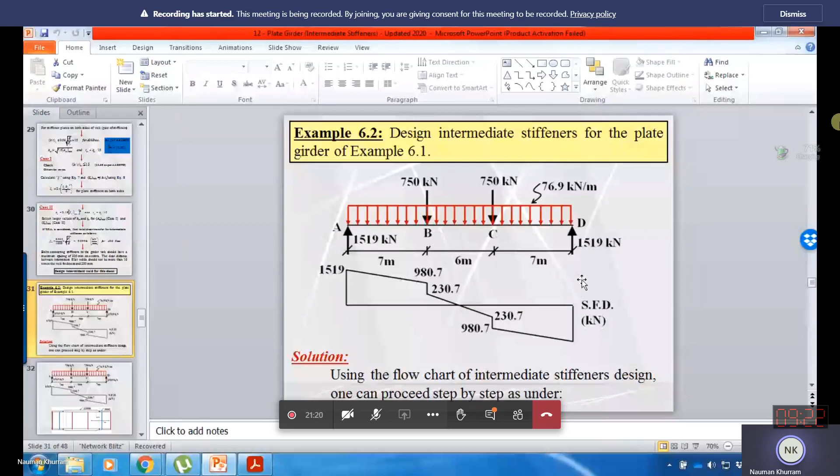But now in this second example, we will check the shear capacity of the web because we know the web size, which was 2300 millimeter in depth and 10 millimeter thick. Obviously the web will buckle, because the thickness is very small as compared to the depth.

So if the shear capacity is less than the applied shear, and we get the applied shear from the shear force diagram, then in that case we need to stabilize the web or increase the shear strength of the web by providing an intermediate stiffener.

By using an intermediate stiffener, we intend to divide the web into different sub-panels. By providing the stiffener, we can also achieve tension field action, and due to tension field action, the strength is further improved after buckling.

So how do we start? We are using the same example 6.1, where we have already given the beam length and the loading, and we have already sketched the shear force diagram, shown here. It is subjected to a maximum shear of 1519, and then shear force decreases within the center span depending upon the applied load.

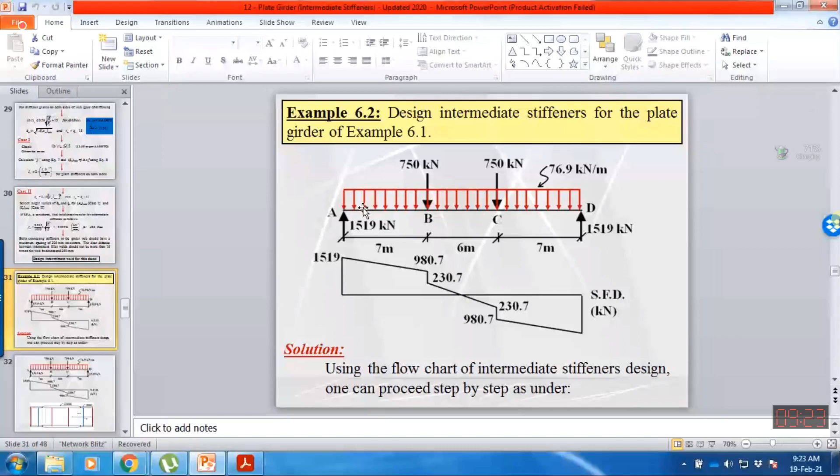When we are given the loading, we already know the location of the bearing stiffener. So we are going to design two types of stiffener: number one is the bearing stiffener, and number two is the intermediate stiffener.

Design of bearing stiffener we will learn in our topic, but for intermediate stiffener we have to carry out the design in this particular example. We already know the location of the bearing stiffener, because what is its function? They actually resist the concentrated force by providing column action.

So bearing stiffeners are provided where we have a concentrated applied force or force reaction, also termed as external forces or concentrated forces. They are provided above the force reaction and underneath the concentrated applied force, to prevent web crushing or web crippling and to safely transfer this concentrated force to the web.

So the location of the bearing stiffener is already known: two are acting at the ends above the force reaction, and two exactly underneath the applied force. One thing more, bearing stiffeners serve both as resistance to the concentrated applied force and also as intermediate stiffeners, so they also fulfill the requirement of intermediate stiffener.

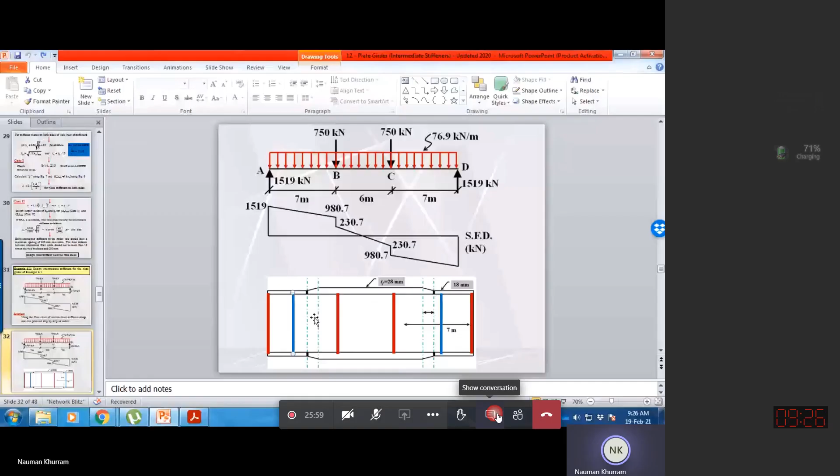In most cases we provide all intermediate stiffeners at equal or uniform spacing. But both AASHTO and AISC suggest that the first stiffener should be provided closer to the bearing stiffener, because the ends are subjected to larger shear force. You can see the shear force is maximum at the end and decreases as we proceed toward the center.

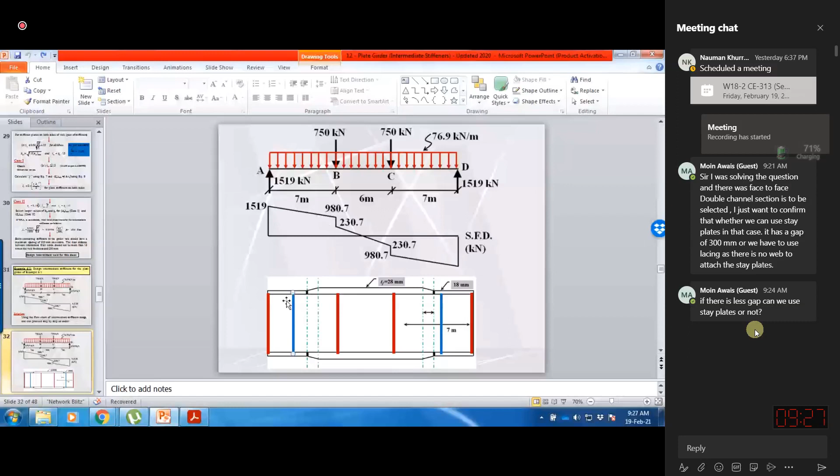So AISC says we should always provide the first stiffener closer to the bearing stiffener, at less spacing, and then the rest of the stiffeners provided in the central span should be at maximum and uniform spacing.

AISC says that because shear force is maximum at the end, we are not supposed to consider tension field action for the first panel. Even though tension field action will be available, we want to ignore it to enhance the shear capacity, or to use a larger factor of safety.

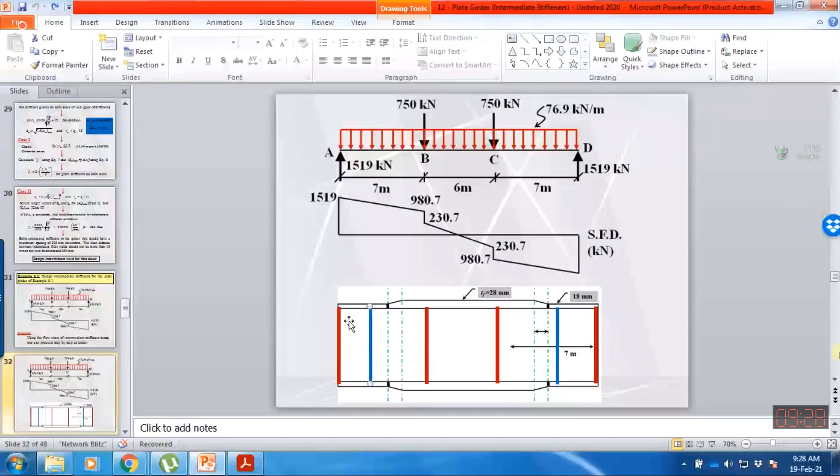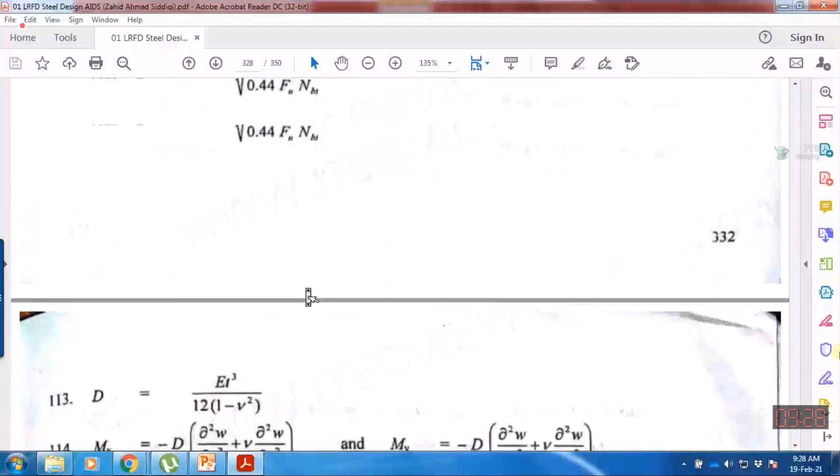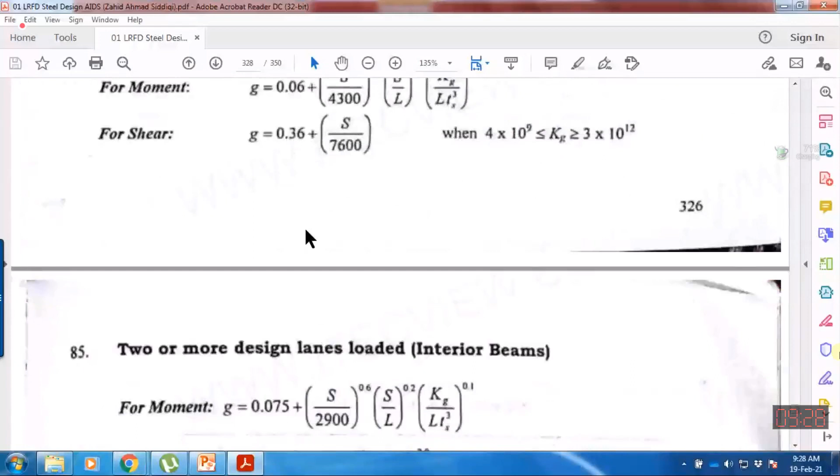So how can we do this? Actually, you don't need to memorize the procedure because the complete design procedure is provided in the LRFD design aid, on page number 324, I guess. So the design flow is also provided there.

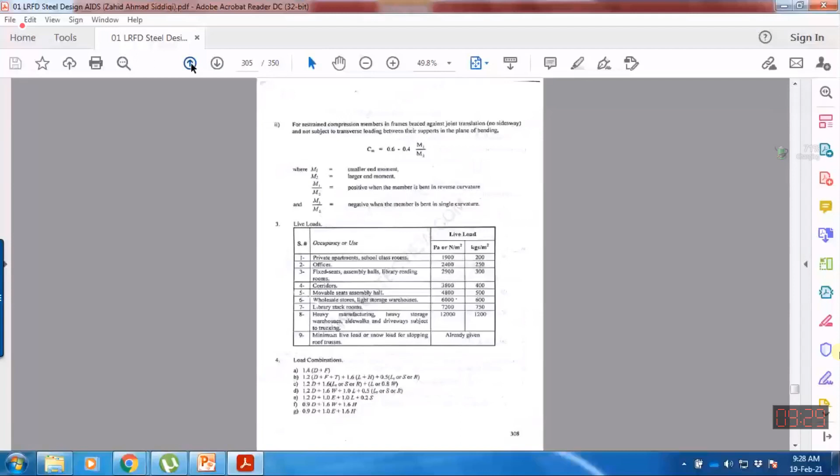Yes, from page number 293 in the LRFD design aid, you have the design flow chart. You can consider this design flow during the examination also, so you have to follow it. I will explain why it's considered this way. As I explain this example, I suggest you open the LRFD design aid and compare the equations, because you're supposed to consult this design flow during the examination.

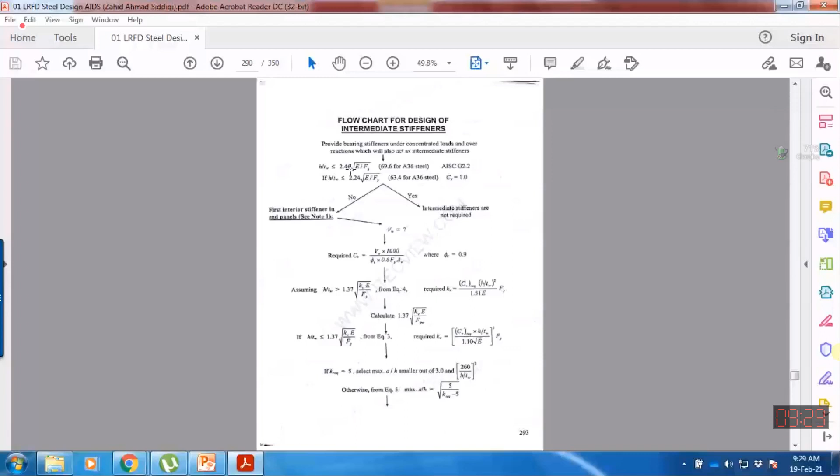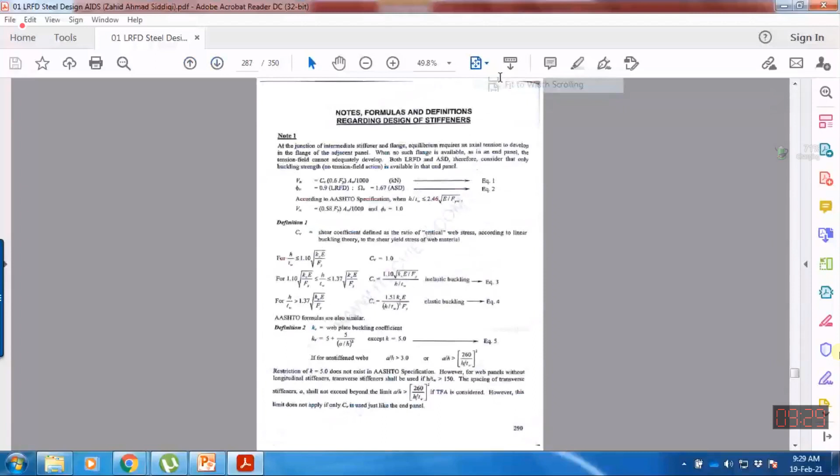Okay, I will explain my design. You are quite familiar with this equation.

In this design equation, the shear capacity should be more than the applied shear. What does it mean? If I want to decide the location of the first intermediate stiffener in this panel, it will be somewhere here, and I want to know the spacing, so I should know the shear capacity of this web panel. This shear capacity will be compared with the maximum shear force subjected in this panel, which is the shear force at any point within this panel.

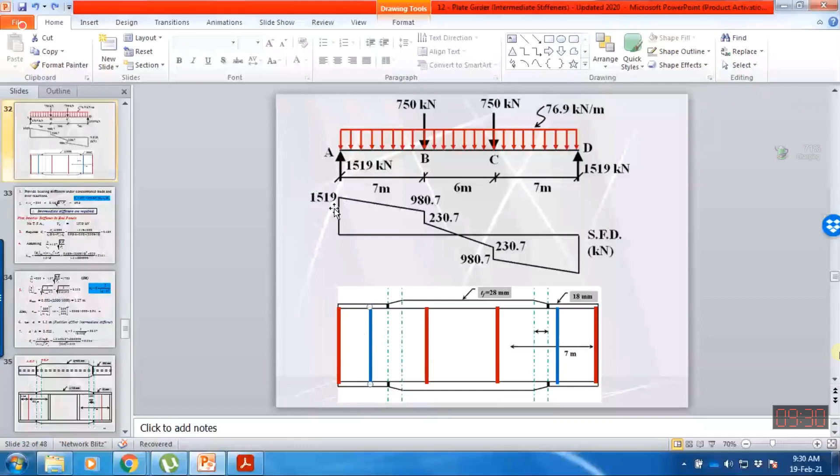So this panel is subjected to a shear force of 1519. So applied shear VU is 1519, and we are going to compare it with the web capacity.

Shear capacity is equal to 0.6 Fy, which is tau y, the yielding capacity of the web, times the height of the web, times the thickness of the web, and into CV. We are ignoring CV prime because we do not want to consider tension field action for the first intermediate stiffener. So the first step is we need to check this case.

Height of the web over thickness of the web ratio, it should be less than this parameter 2.24 under root E over Fy. You've been using this equation in hot rolled design, because if height over thickness of the web is less than this parameter, the web will never buckle - it will always fail due to shear yielding.

So in that case, CV value is equal to 1. But if this value is more than this factor, the web will always be under buckling and CV value will be less than 1, because CV converts the shear yielding strength into the buckling strength, or critical shear stress at which the web will buckle.

Okay, for the first intermediate stiffener, we do not want to use tension field action. So VU will be 1519. Actually, we want to determine how much CV value is required to have shear capacity equal to VU. Because we know 0.6 Fy, we know the height of the web, and we know the thickness of the web. So we want to determine the minimum CV value required such that shear capacity should be more than VU, and from this CV we want to determine the spacing of the first intermediate stiffener.

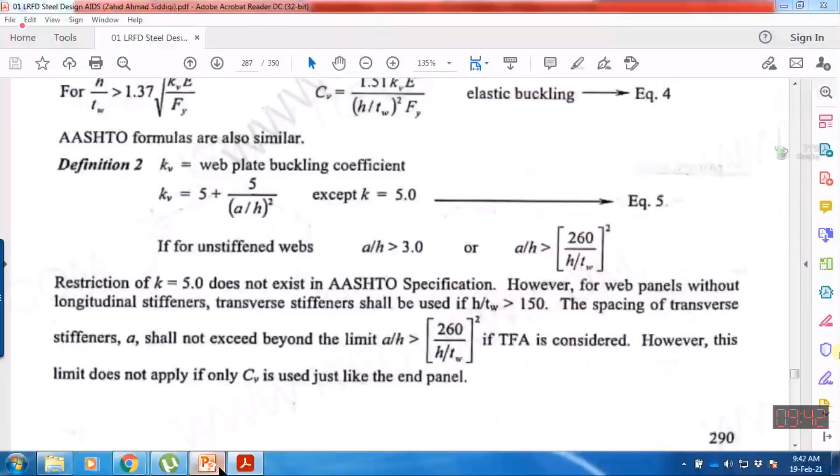So A required is 1.27 and A maximum by AISC, substituting the values, 260 divided by 230. We have divided the whole parameter by 1000 to convert the A maximum into meters.

If this value comes out to be more than A maximum, then we will provide the stiffener at maximum spacing. So A required is, whichever is lesser out of these two, that is the A required. So first stiffener should be provided at a maximum spacing of 1.27. So spacing of first stiffener should not be more than 1.27.

But we will provide at a spacing less than this value, maybe to bring it to a safe limit. So here we have selected the A value 1.2, a little bit lesser than this value. You may select 1.25 also, that will be perfectly fine. If in examination somebody has taken this value 1.25 or somebody has taken 1.2, both are perfectly okay.

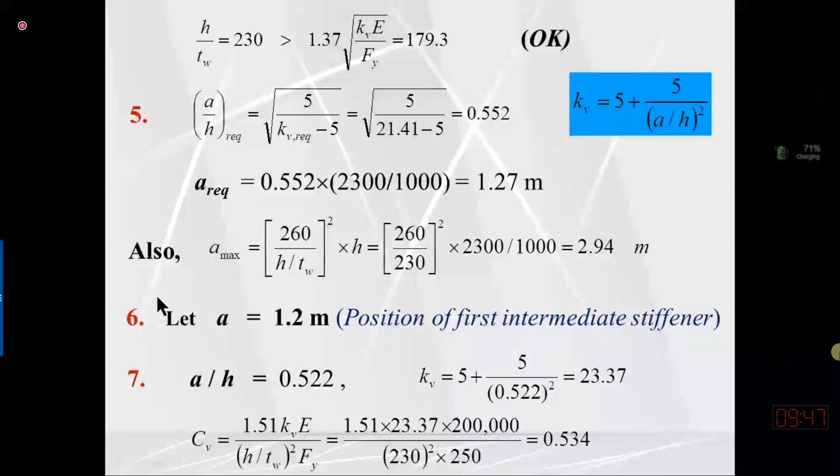Okay, next we are having this panel now. In this panel, we need to check whether we require the stiffener or not, because first stiffener we have provided at 1.2, just like here. So now for this panel, maybe we do not require a stiffener. First, we need to check the capacity of the web without any stiffener.

So what is the applied shear for this panel? We need to check what is the maximum shear force within this panel. So the maximum shear force will be at this edge, at this point, which is at a distance of 1.2 meters from this end. So we can determine from the shear force diagram: 1519 minus 1.2 times 76.9.

If there is any student who just logged in, Naveer Abbas, if you have just logged in, please feel free to talk.

So we need to check what is the shear force for this second panel, or for the other intermediate stiffener. VU will be equal to maximum shear force at this edge, which is 1519 minus 1.2 of 76.9. Maybe we do not require a stiffener here, maybe the shear capacity of the zone is more than this applied shear. So we need to check this.

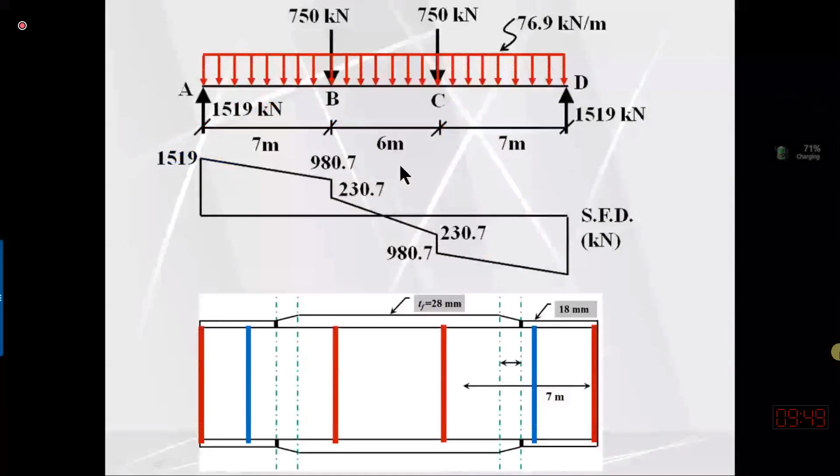For the second intermediate stiffener, what is the VU? VU at a distance 1.2 is 1519 minus omega into x, where x is 1.2, and omega UDL load is 76.9. So VU, applied shear for the next panel, will be 1426.7. Maybe we do not require this stiffener for the next panel.

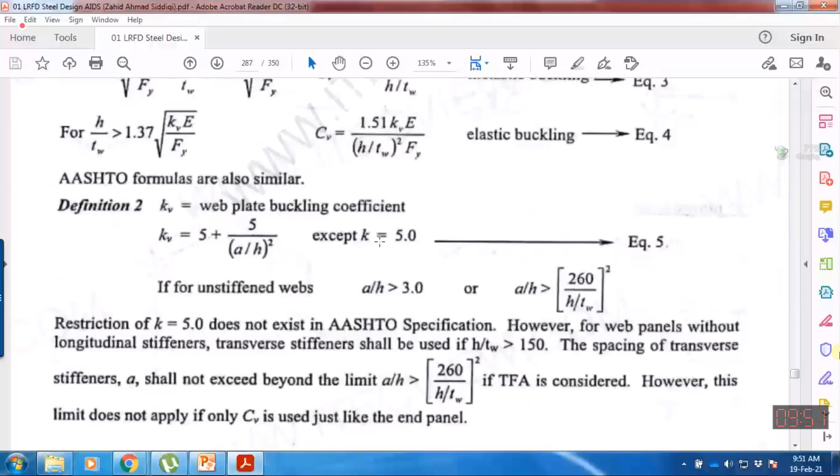So what we will do is determine web capacity without an intermediate stiffener. In LRFD design aid, if we are not providing an intermediate stiffener, then KV value will be equal to 5. This KV value of 5 doesn't exist in the specification, but we have said that if we are not providing an intermediate stiffener, or providing it at more spacing, KV value will be equal to 5. Using this KV value of 5 gives the CV value for the shear capacity of the web alone, so these parameters can be simplified for KV value equal to 5.

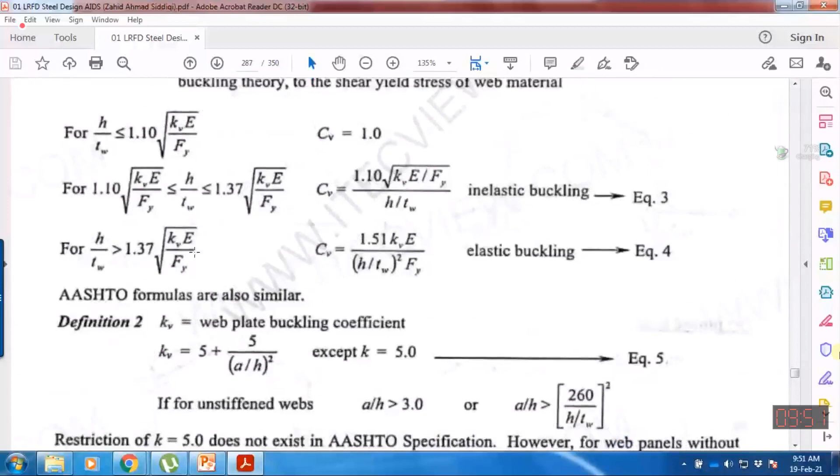In this equation, KV value equal to 5, and E value is 200,000. This 5 times E gives 1,000,000. So if you take the square root of 1,000,000, that gives 1,000, and 1,000 multiplied with 1.37 gives the answer 1370. So you can convert this parameter for KV equal to 5, and this parameter will become like this.

For KV value equal to 5, this parameter, which is 1.37 under root of KV into E over Fy, if you substitute KV value 5 and E value 200,000, this parameter becomes 1370 over under root of Fy.

Just check the height of the web over thickness of the web ratio. It is more than this parameter, and this parameter is the same as that parameter. So in that case, you need to use this equation to determine the CV value.

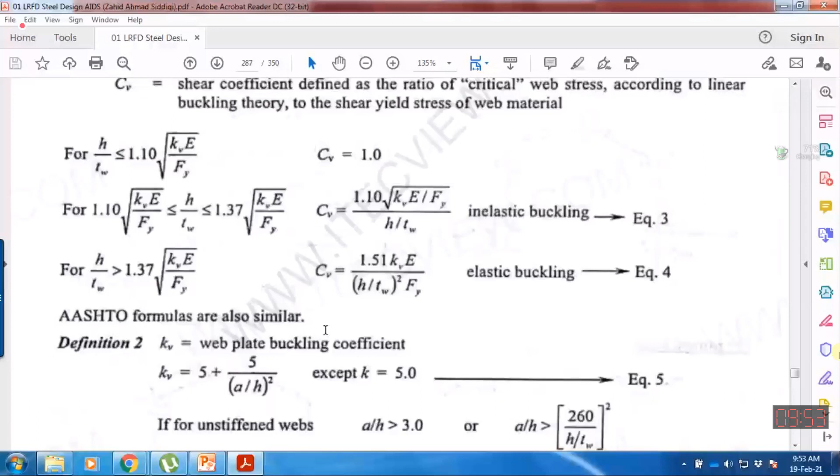After substituting all the values of height over thickness of the web and Fy, the CV value comes out as 0.114. What does this mean? It means the web is buckling at a stress value equal to 11.4% of the shear yield value, or the buckling strength of the web is equal to 0.114 times the shear yielding value. So almost 89% of strength we are losing, or not able to achieve, because the web is too slender or too thin.

But anyhow, we are using this CV value to determine the shear capacity of the web panel. So phi V is 0.9, 0.6 Fy. We substitute the value, area of the web 23000, and the CV value we have placed. So this gives the capacity, 350 kilonewton. This is the capacity of web alone if we are not providing any stiffener.

So web capacity is 354. The web will buckle at an applied load of 350, but the applied shear is 1426, which is more. So it means that the intermediate stiffener, for height of the web over thickness of the web, the second condition is satisfied, which is less than 260.

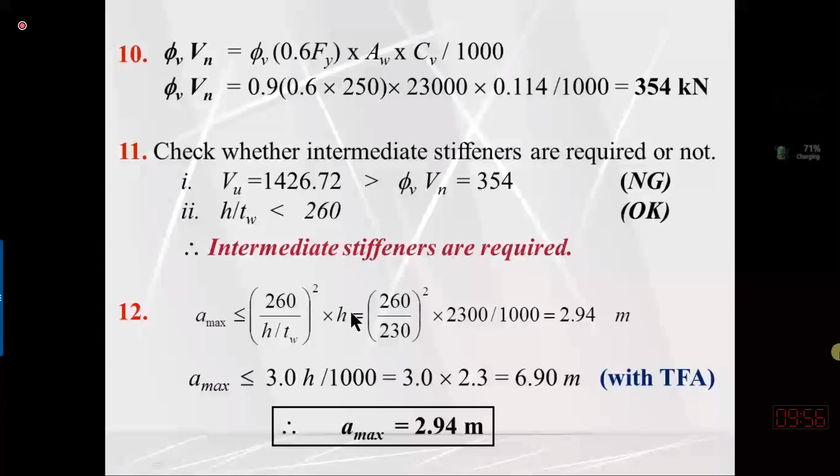So both tension field action formulas, CV prime and CV, are functions of spacing of stiffener value. So first we want to provide the stiffener at maximum spacing. We have two formulas for maximum spacing, as we have also seen in the LRFD design aid. One is A over H ratio equal to 3, and the other is by equating A over H ratio equal to 260 divided by lambda W value whole square.

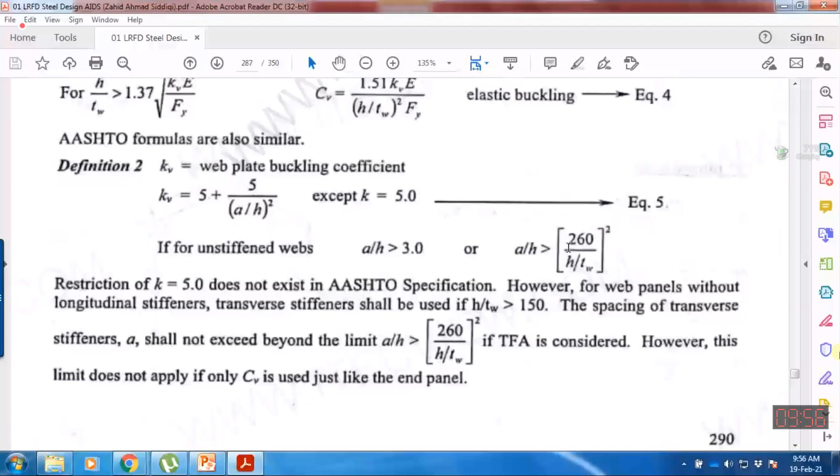So if spacing is more than these values, we will consider that even though the stiffeners are provided, they are not contributing to the shear strength. So A maximum is obtained from these two equations, and the lesser value out of the two will be our A maximum that we can provide.

So these are the same equations, but H is moved to the other side. First, A maximum is determined as 260 divided by height of the web over thickness of the web, multiplied by H, which gives 2.94. The second equation gives A maximum equal to 3H. The lesser answer out of these two is 2.94, meaning the second stiffener may be provided at a maximum distance of 2.94.

So first we take this 2.94, and we need to provide at this spacing. We need to decide the stiffener location in this panel, so how many stiffeners are required? We can easily determine this. For example, what is the distance from this intermediate stiffener to this end stiffener?

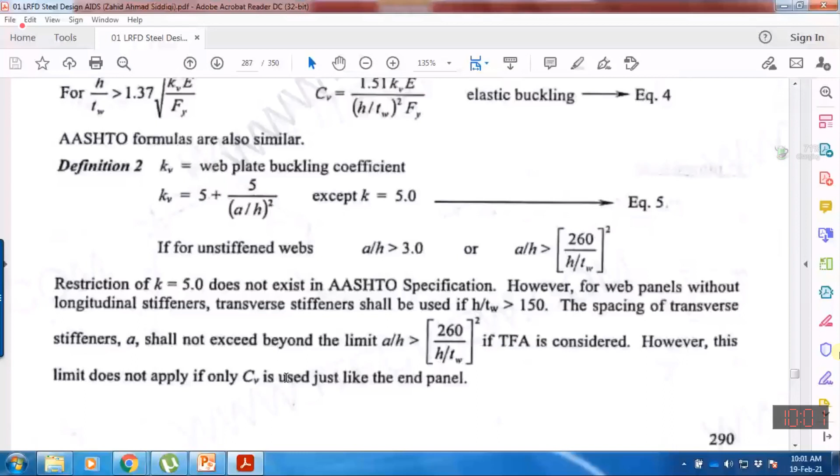You can compute this parameter, 1.37 under root KV into E over Fy, and this parameter is 116, which is less than 230 of the height of the web over thickness of the web ratio. So this condition is satisfying, because this parameter is less than the height of web over thickness of web ratio, so we need to use equation number 4 to determine CV value. So equation number 4 is used: 1.51 into KV into E value divided by height of web over thickness of web ratio into Fy. So CV value comes out to be 0.186.

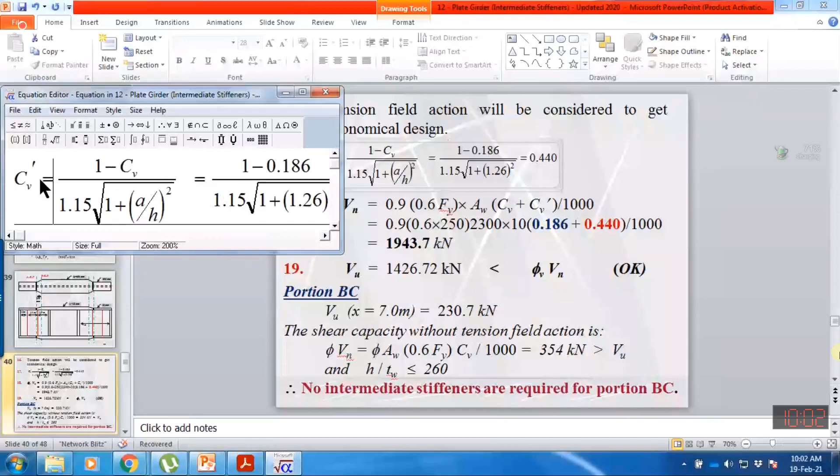And further, we want to achieve tension field action for the second panel, so tension field action will be considered. CV prime value is computed by this equation. Let me correct it — there should be an equal sign. This equation is also given in the LRFD flow chart.

When we determine this CV prime value by substituting all the values, the answer is 0.44. Now we will determine the shear capacity using this formula: V equal to 0.6 Fy, area of the web, CV plus CV prime, because now we want to use the tension field action also.

Phi V is 0.9, 0.6 Fy, web 2300 into thickness of the web. CV value is 0.186 and CV prime is 0.44.

Please understand one thing. Earlier I have explained that field action improves the strength almost 2 to 3 times more than critical buckling strength, or post buckling strength provided is almost 2 to 3 times more than the web buckling strength. So CV prime is the fraction or factor which is letting us know the post buckling strength in terms of yield strength.

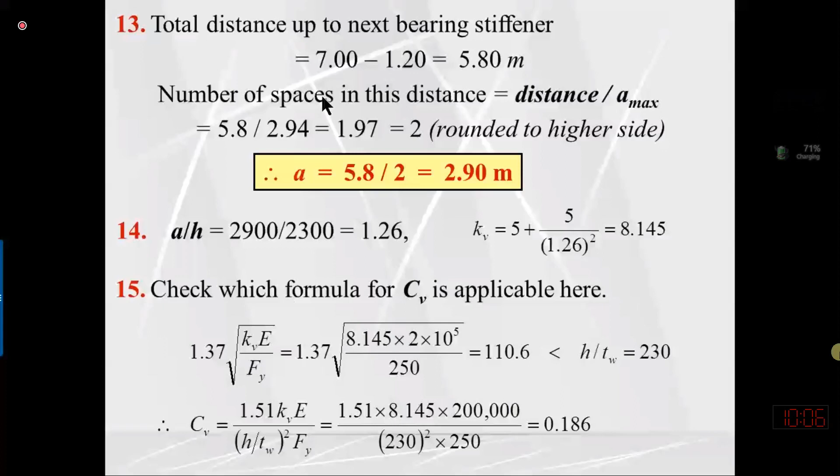You can again determine A over H value and CV value and CV prime, and then you can again recheck the capacity. So if the capacity is more than VU, then it is okay. If the capacity is still less, you keep reducing the A value, and by hit and trial you want to determine the maximum A value for which the capacity is just equal to or more than applied shear. Okay, next is

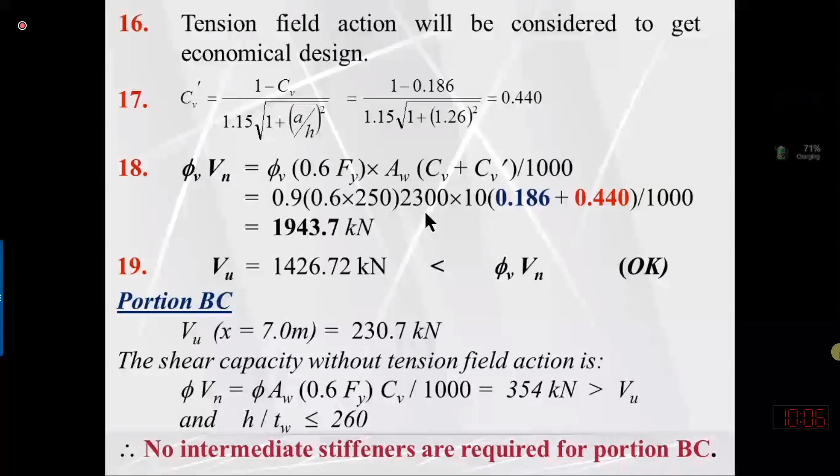Now we have decided the spacing of the stiffener. So we are having one bearing stiffener here, which is also serving as an intermediate stiffener. Now we need to check whether we require any stiffener here or not in this second panel.

In this second panel, or sorry, in the middle portion, first of all, we need to see what is the applied shear for this central portion. So in this central portion, the maximum shear is at this edge, which is 230.7. So applied shear is 230.7, so central span is having the applied shear 230.7.

But what is the capacity of the web alone? We have just determined. So capacity of the web alone without stiffener is 354, which is more than applied shear. This means that we do not require any stiffener in this central portion.

So VU value at a distance 7 meter is 230.7. That we have already seen from our shear force diagram, 230.7. So applied shear is this one.

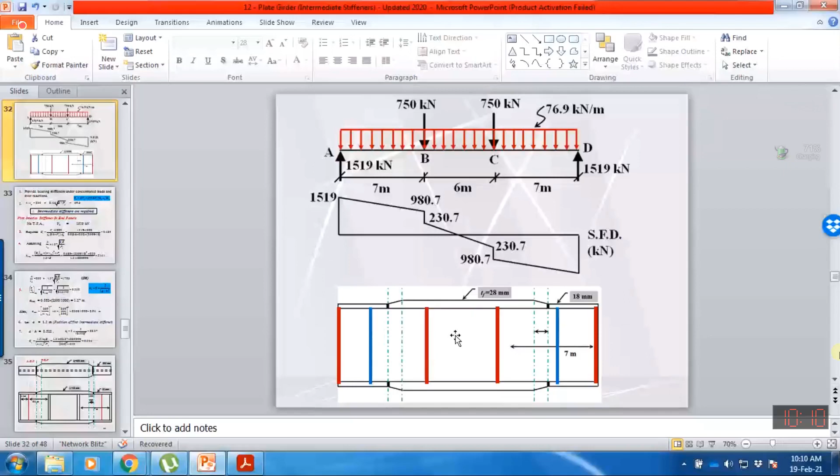So in the first phase, we have computed the size of the spacing of the stiffener. I will not take a break because the next phase is maybe just a small portion. We just need to select the size of the intermediate stiffener. So I will continue because I will try to finish up the lecture earlier.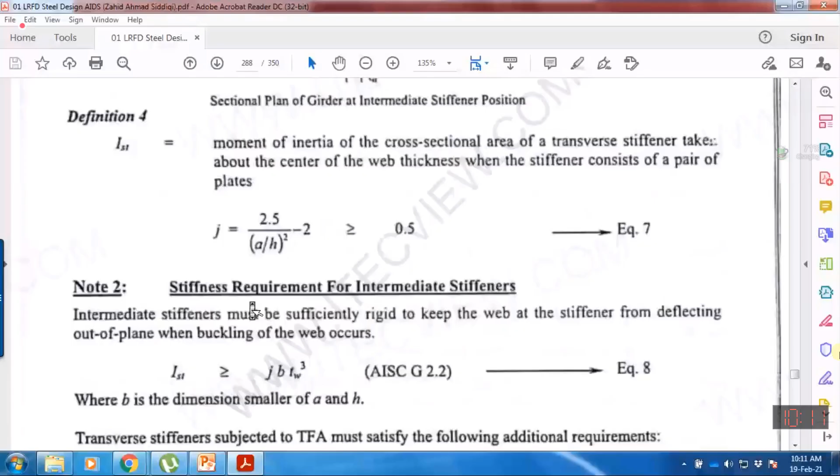So now in the second phase, we need to decide the size of the intermediate stiffener. So the size of the intermediate stiffener is fixed by this AST minimum. Now I will keep on showing you this because I'm following this design flow. I have already completed that. Now I'm carrying out this size of the intermediate stiffener.

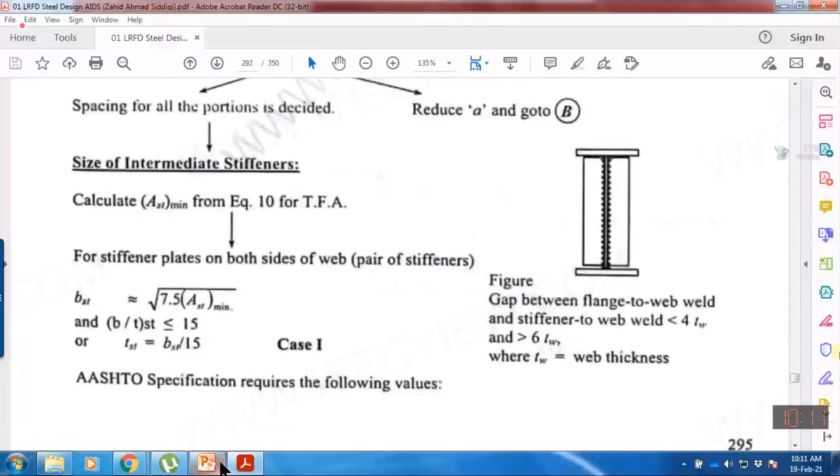So we need to compute the AST minimum, or minimum area required for the stiffener, from this expression. This equation will give the maximum answer if CV value is lesser, and lesser CV value is for the interior segment. So it means that we need to determine the AST minimum for the first stiffener and for other intermediate stiffener, whichever is giving the larger value, that is our AST minimum.

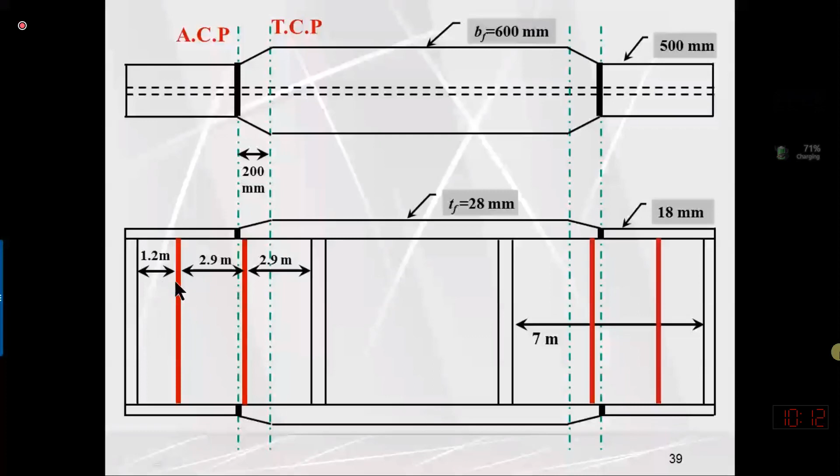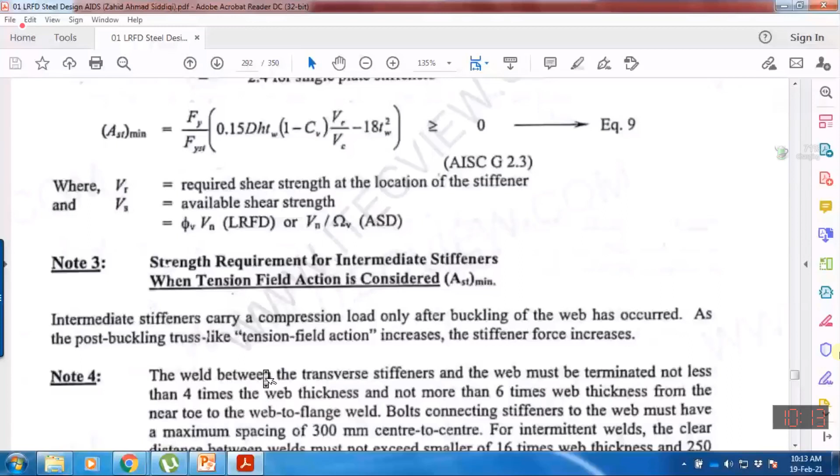ds is the distribution parameter. If you want to provide intermediate stiffener in pair on both sides, then ds value will be equal to 1. Otherwise, this value will be equal to 1.5, maybe 1.8 that we have already discussed, in our specification or design aid. This might be mentioned, yes. If you want to use single plate for stiffener only on one side, then this value is 2.4, but we want to provide this stiffener in pairs, so this value will be equal to 1.

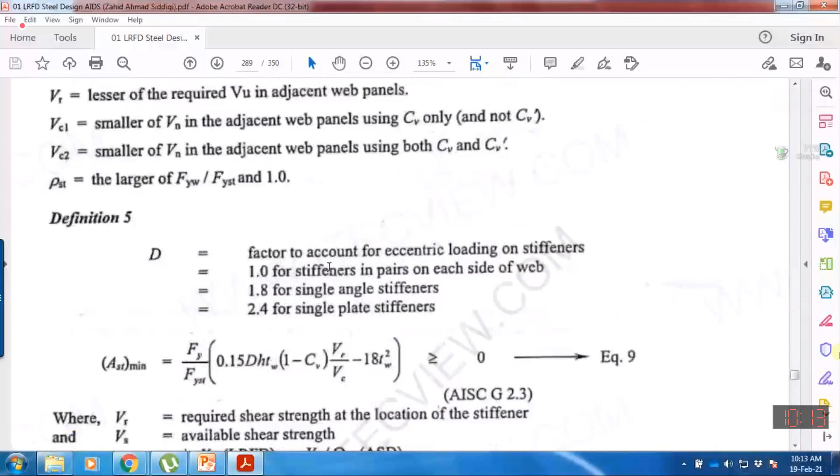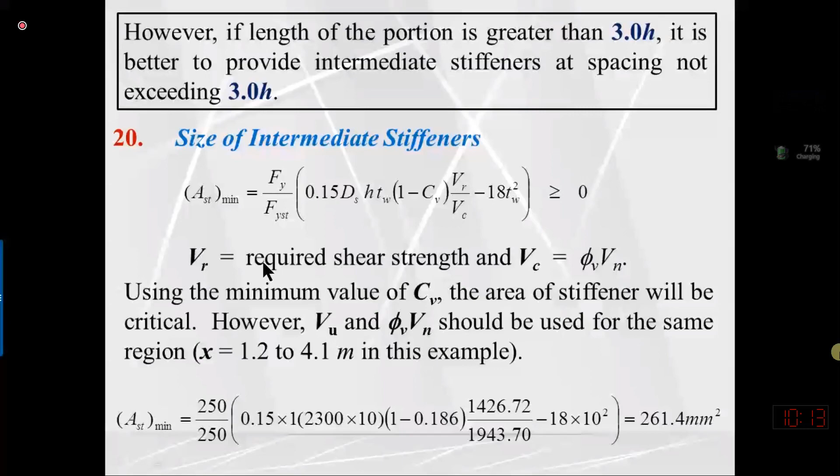And what is the VR value? VR is applied shear or required shear strength, or VC is the capacity of the panel with stiffener. So VR is the required shear, which is equal to VU, the applied shear force that we have already considered in design. And VC is the capacity. However, VU and phi VN should be used for the same.

So we need to compute two AST minimum, for the first stiffener and for the second stiffener. So for the second stiffener, VR is the applied shear, which is 1426 for the second stiffener. 1426 is the applied shear, which is equal to VR.

And what was CV value for the second stiffener? 0.186, and when we determine the capacity, it was 1943.7. So for the second stiffener, VU applied here is 1426, capacity is 1943, and CV value is 0.186.

So AST minimum for the second stiffener is, by substituting the value in this equation, ds value 1 because we want to use the stiffener in pairs, height of the web and thickness of the web, CV 0.186, VR is VU applied shear for the second panel, VC is the capacity of the stiffener with second intermediate stiffener, and 18 times of the thickness of the web square.

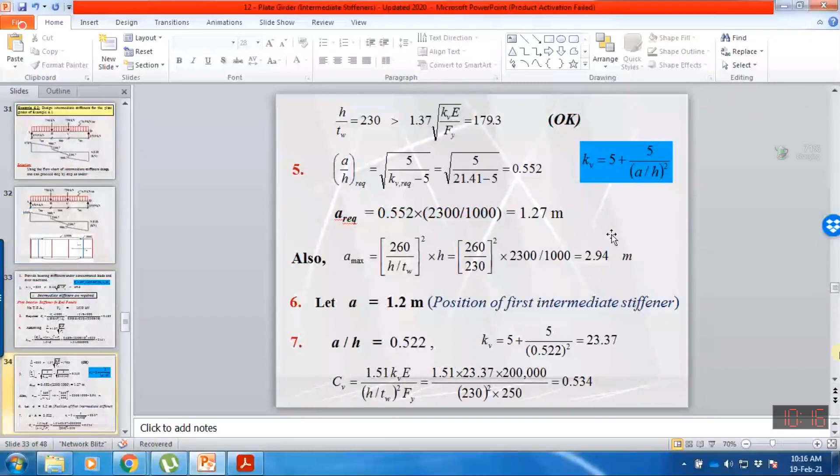So applied shear for the first panel is 1519, CV value 0.534 we computed, and the capacity 1656 for the first panel. So when we substituted this value, our answer is almost zero. So it means that AST minimum is coming critical or larger for second panel, which is 261.4.

Actually, I have already explained this equation when we proportion the flange of the plate girder. So B over T ratio of stiffener should be less than or equal to 15. So by using this equation, if we multiplied it by B and also divided the same equation by B, this will be B square, and B into T is equal to area.

So if we are bringing the area to the other side, actually we want to determine the size of two stiffeners, so that will be multiplied with 2, because we want to provide these two stiffeners. That's why this equation is multiplied by 2, and 2 is dividing on both sides, so that will become B square equal to 7.5 into AST minimum. So if we want to determine the width of one single stiffener, that will be square root of 7.5 times of the AST minimum that you have just determined.

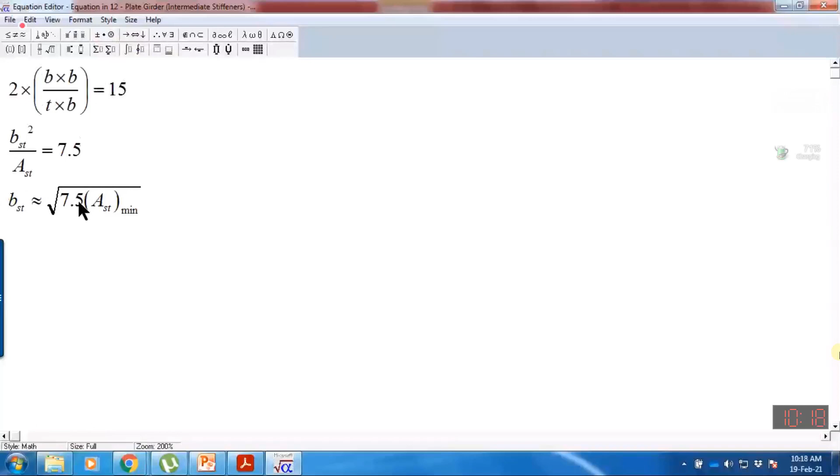So by using this equation, we have determined the BST minimum and answer is coming out to be 45. So thickness can be determined by using the same equation because we want B over T ratio less than 15. So B value divided by 15 is equal to thickness of stiffener, which is lambda R value for A36 steel. This is only for the stiffener.

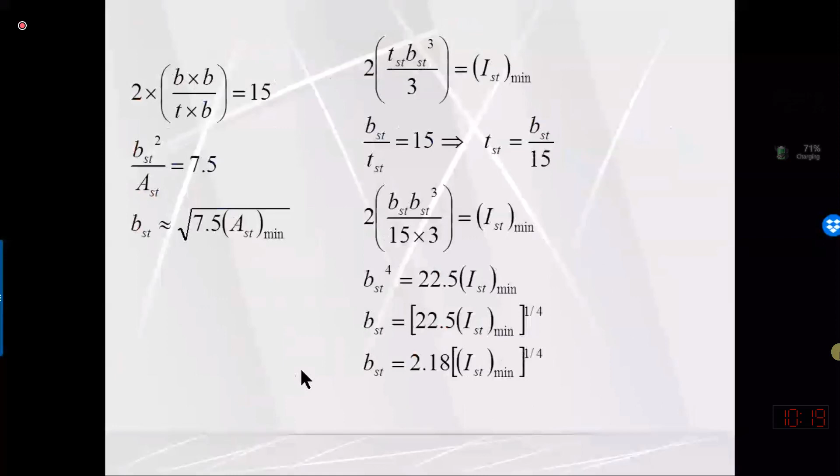So next, after this, we need to check the minimum moment of inertia, whether the size is sufficient to provide the minimum moment of inertia or not. So I minimum is equal to... I will show you this equation.

So I minimum we are computing by this equation, J into B into thickness of the web cube. J is computed by this equation: 2.5 divided by A over H ratio, minus 2. And B is the lesser out of A and H. So we can compute this, and thickness of the web we also know. So we will compute the...

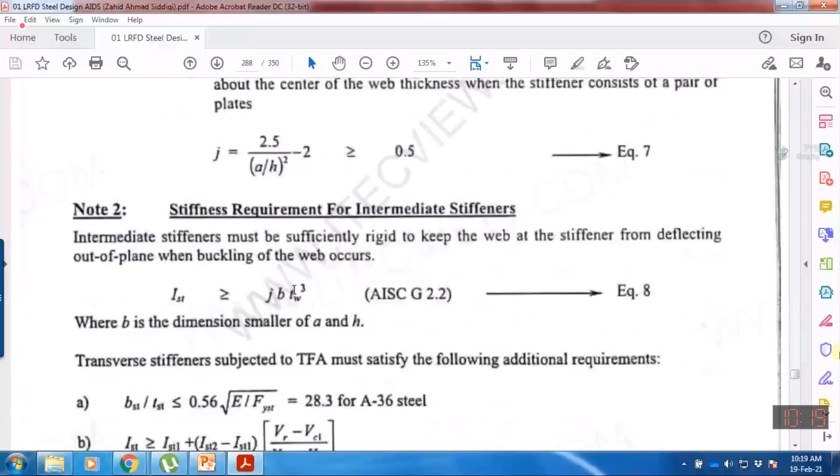J value for the first stiffener and also for the second intermediate stiffener. And we will see that whichever is larger, that would be critical, because I minimum will be more if J value is more. So A over H ratio for the first intermediate stiffener is 0.52.

Because for the first stiffener, spacing is 1.2 meter. And for the second intermediate stiffener or the second panel, A value is 2.9. So we need to see which equation or which panel has the larger J value. J value is 7.25, so we shall use this. So I minimum is equal to J into B into thickness of the web cube.

When we are computing this I minimum, you can compute I minimum also for the first panel and also for the second panel. So J value, and B value is the lesser out of A and H.

So A value is lesser than height of the girder, so B value will be 1.2 meter or 1200 millimeter. So 870 into exponent 4. I need to check from the book, maybe there might be some correction required.

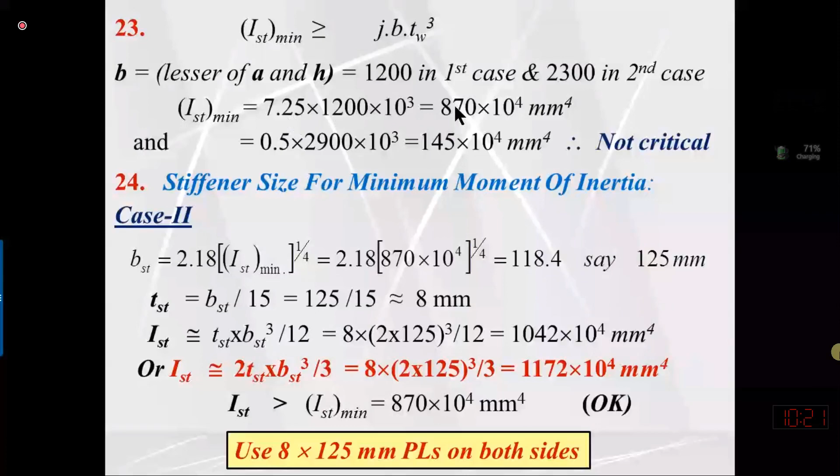And I ST minimum for the second panel. So I guess I have some mistake over here. I will check. So this answer, I guess, is 115 in the book. So I will check the calculation.

Sorry, this spacing is 2.9. So let me verify what is the mistake. For the second panel, we have provided stiffener at a spacing, and the answer which we have computed from the book is 2.9.

So I need to correct this. So actually this value, 2.9 - this is a mistake over here. So quickly let me check this answer. So 2.9 multiplied by... so this is 145. I will make it 145. So please check in the book, if there is a mistake you can correct it.

So this IST minimum we are computing, so the larger answer is coming from here. So IST minimum will be larger out of these two equations. So IST minimum will also be larger for the first panel, 870. Okay, how come we have this for this equation? I will explain.

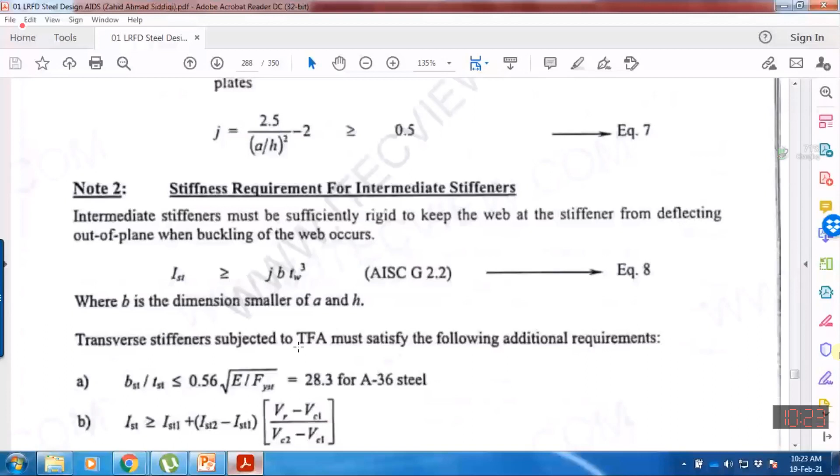So the minimum value - moment of inertia of a single stiffener is equal to T B cube divided by 3. How come we are getting this equation? Let me explain from here. So we want to compute the moment of inertia of the stiffener about the center line of the web or longitudinal axis of the web, assuming thickness of the web is 0 - in other words, about its base.

So for a rectangular section, if you want to compute the moment of inertia about its centroid, that will be B D cube divided by 12. But if you want to compute the moment of inertia about the base, that will be B D cube divided by 3. Since we want the moment of inertia of the stiffener about its base or center line, assuming thickness of web is almost 0, moment of inertia of one stiffener about its base will be T B cube divided by 3.

So that's why moment of inertia of a single stiffener equals T B cube divided by 3 about the base. Moment of inertia of two stiffeners will be equal to 2 times this - to compute moment of inertia of two stiffeners, we multiply by 2. Similarly, we know B over T ratio is less than or equal to 15, so I'm assuming B over T ratio as 15, so T will equal B over 15.

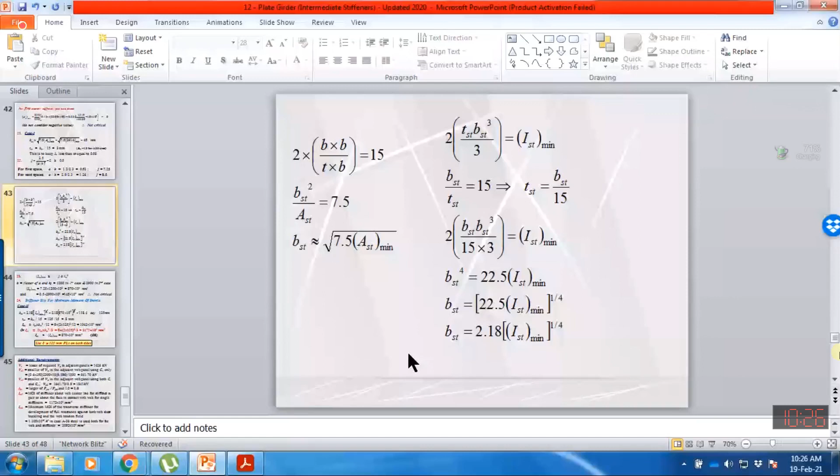So based upon IST minimum, the minimum B required. So we have determined two B values: one based upon AST minimum, and second based upon minimum moment of inertia. That's why this expression is written in LRFD design aid.

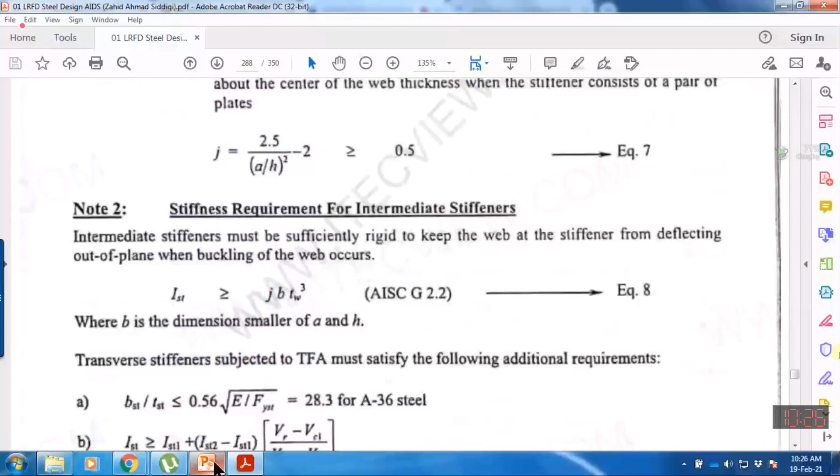We are computing the B minimum to stabilize the web because we require minimum moment of inertia to avoid buckling of the stiffener in the out of plane direction.

After substituting the IST minimum value, B comes out as 118.4. So this is B minimum. The width of the stiffener should be equal to or more than this value.

Let's say we have selected the width as 125. You can also select 120, but normally it should be a multiple of 5 millimeter, or maybe 25. So we have selected 125 mm.

So to maintain the B over T ratio equal to 15, we can select the thickness by dividing the B by 15.

I will suggest using the second equation to determine the moment of inertia. Here he has used this equation because he has considered both B values as a combined value.

If you are using any one of the equations, what he has considered is both stiffeners as one rectangular section having total B as 2B. So if this is equal to 2B and this is thickness, to compute the moment of inertia about this center, which is the center of the web, that will be T into 2B cube divided by 12, or the moment of inertia of one rectangle about its base multiplied by 2.

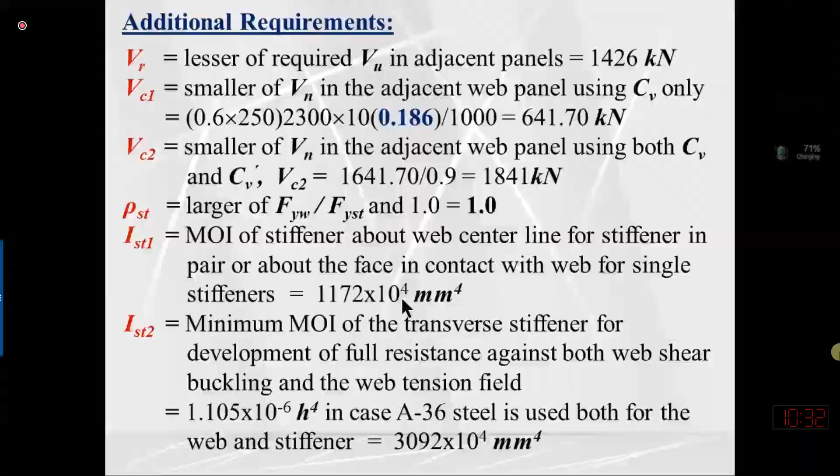No, he has considered this value that we called IST minimum, by equation number 8. So equation number 8, this one, is what we used to determine IST minimum.

So this is supposed to be 870, but in the book he has considered it as 145. Anyhow, you will check it, but I believe the answer would be 1172 or 1042. Check it, I will let you know.

And IST2 is the minimum moment of inertia of the transverse stiffener for the development of full resistance against both web buckling and tension field action, which is computed by this expression.

This expression is already given, we have already discussed and highlighted it, so that must be determined by this equation. If you substitute the H value of 2300 millimeter, you will get IST2 as 3092. Okay, then what are the other values?

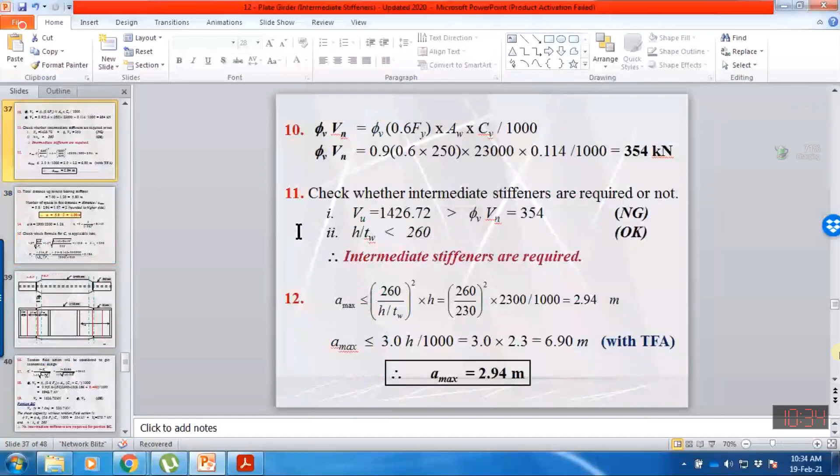It is 1400. For the first panel it is 1519, and for the second panel this value is 1426. So VU value is the lesser of required VU in adjacent panel.

The adjacent panel is the panel for which we are assuming tension field action, and the panel for which we are not achieving tension field action is 1426. VC1 is the smaller of nominal capacity in adjacent web panel using CV only, and VC2 is using both CV and CV prime. So first, VC1: which panel, whether this one or this one, has less shear capacity, ignoring the tension field action? How can we compute this?

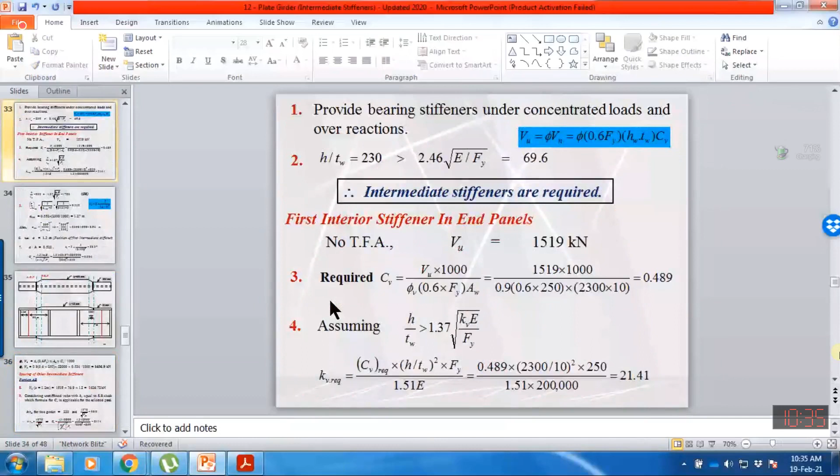For the first panel, when we design and determine the shear capacity, this is the VC value, excluding this Vn. If I divide this value, 1656.9 divided by 0.9, the answer is 1841. This is the capacity of the first panel without tension field reaction, using CV only.

So it means VC1 will be equal to 0.6 into 250 into 2300 into thickness of the web 10 into 0.186, divided by 1000. The answer is 641.7. So the nominal capacity of the second panel without CV prime, or without tension field reaction, is 641. So this is the answer.

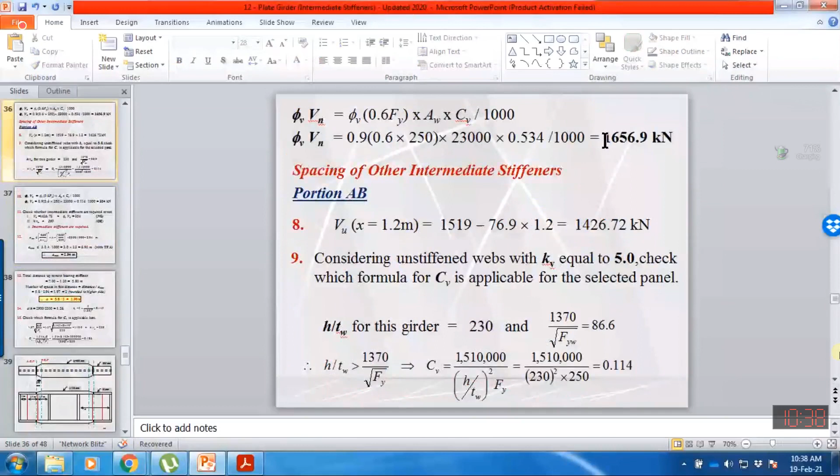1641.7 divided by 0.9, it is lesser. So after substituting the values in this equation, IST, this value will actually be... he has used 145. I will check why he has used 145. Let me check.

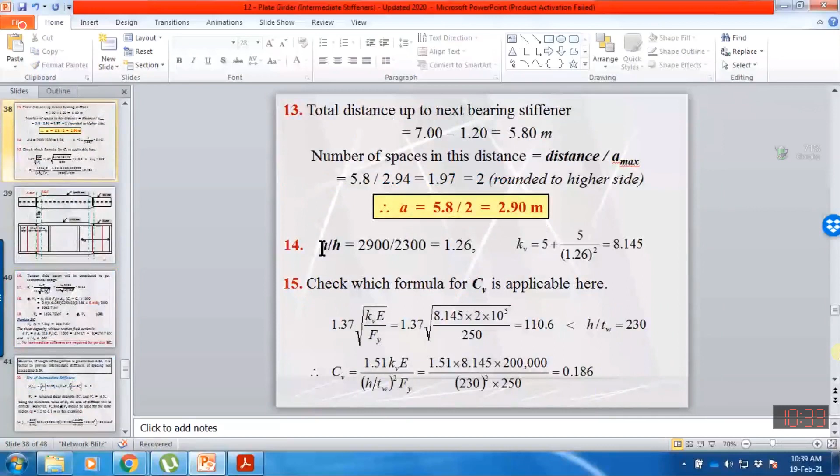For J value 0.5, we're supposed to use this value, 145 IST minimum. But when we compute it, I believe the answer should be 1172. I will check this in the book, but I believe IST1 should be 1172 for the minimum moment of inertia.

Anyhow, when we compute this value, the answer comes out to be 2657, which is larger. So we need to recompute the size of the stiffener for tension field reaction using this IST. If we use this IST, as I've already explained, we can compute BST minimum, which comes out to be 183. We will round to the upper side.

You can either use 185 or 190 to maintain B over T ratio equal to 15. So the T value required is 7 mm. We require a 7 into 185 mm intermediate stiffener to achieve the tension field reaction. So we will replace this, this is the stiffener size. This size is larger than this size. But I will check, there might be some mistake.

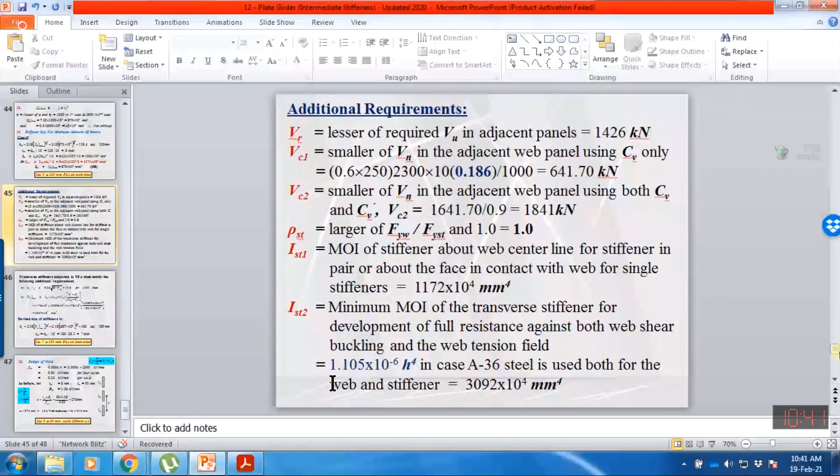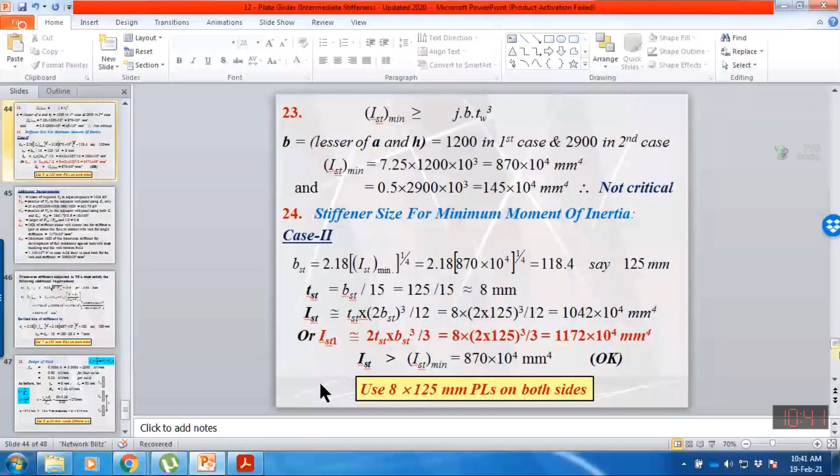So we will provide this size. Actually this size is already lesser than this, so it is better to use this larger size. But in the book, maybe I guess there is some mistake in the calculation. Oh yes, we shall use this size because it is larger, more than 125. So next we need to design the weld.

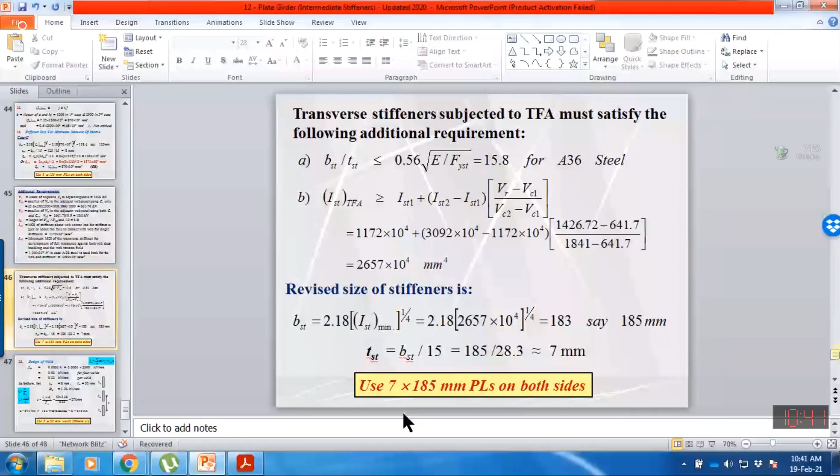So when we are designing the intermediate stiffener, it is to be connected by welding on both sides. We are welding on this side and also welding the stiffener on both sides. We are also providing the stiffener on the other side of the web, which also needs to be connected by two welds. It means that at this plane, the shear stress produced in the web is transferred to the four welds.

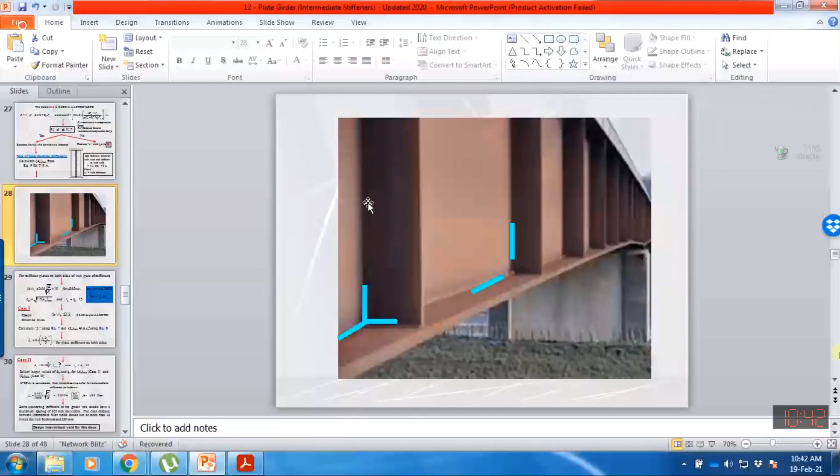So it means that the total shear flow acting in this perpendicular direction must be transferred in the four welds, because two welds will be used to connect the stiffener on one side of the web, and two welds connect the stiffener on the other side of the web.

So AISC has given an empirical formula to compute the shear flow which is to be transferred from the stiffener to the web or vice versa. The empirical formula is 0.0004 into H. H is 2300, so the total shear flow which must be transferred from the web to stiffener or stiffener to web is 0.92 kilonewton per millimeter. For a single weld, we need to divide it by 4, which is 0.23.

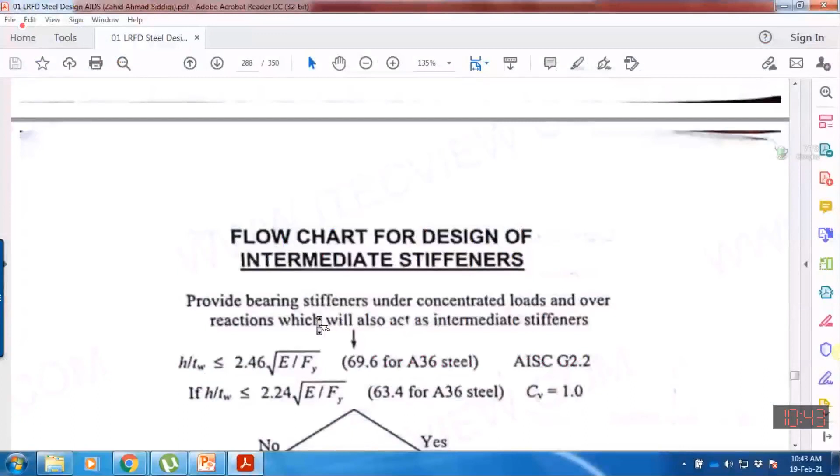So I have already explained that for intermediate stiffener, we connect... it is maybe better to explain from where the design flow is. So we are connecting the intermediate stiffener.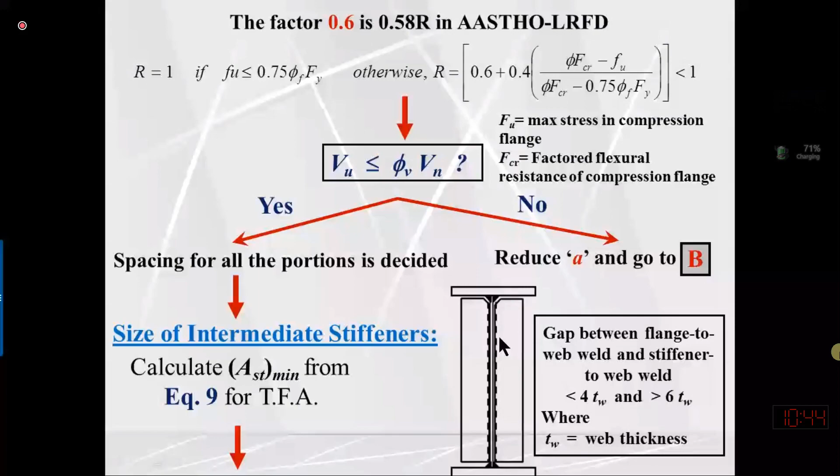The flange will be connected with the stiffener with continuous weld. We are providing the continuous weld over here. We shall discontinue the intermediate stiffener from the tension flange by providing a clear gap in between 4 to 6 times the thickness of the web. But here we need to provide intermittent weld because we want to save material, so we will provide the weld corresponding to LW minimum. LW minimum is equal to 4 times the thickness of the weld, which comes out to be 32 mm. So LW should be provided more than LW minimum.

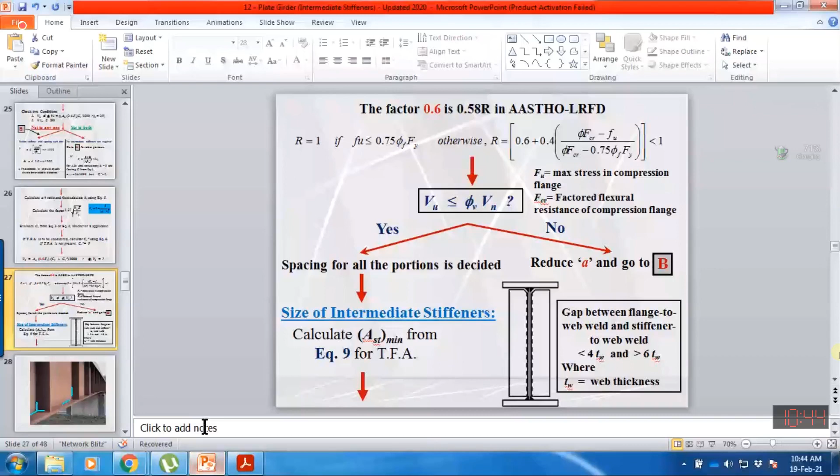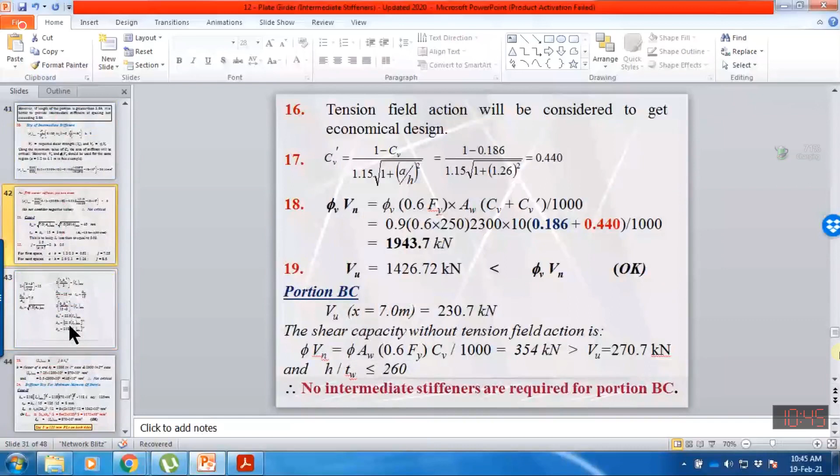I'm not going to repeat this. We have already computed the LW minimum when we proportioned the plate girder. We have already decided 50 millimeters, and the thickness of the weld needs to be maintained the same throughout our structure member. The weld value we computed is 1.26, so I'm not going to repeat it. You can consult example 6.1. I will show you where we already decided the thickness of the weld and the weld value.

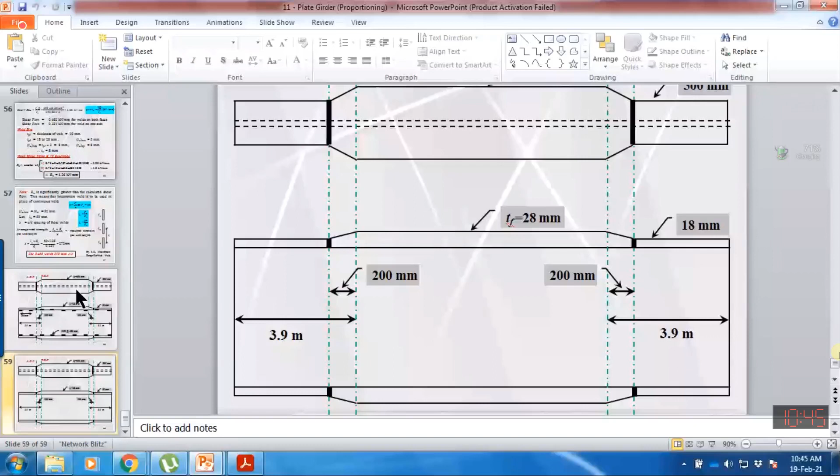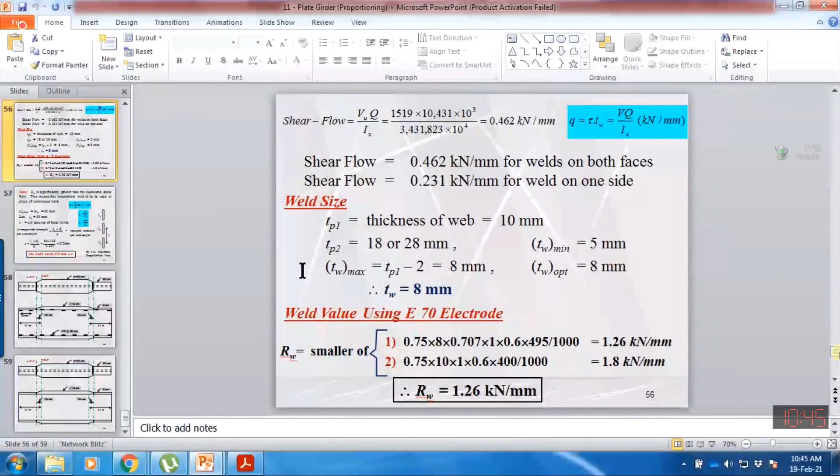Here, we decided by considering TP1 and TP2. TP1 is the thickness of our web, and TP2 is the thinner plate. So we decided the thickness of the weld, and when we computed the weld value, it came out to be 1.26. LW minimum is 4 times the thickness of the weld, which is 32, and we decided the length of the weld as 50 mm. So by using the same concept of shear flow, we have to decide the center to center distance or pitch of the weld.

So by using the same concept, length of the weld is equal to design weld force divided by the weld value, and this design force is in kilonewton, but we are given the shear flow. This means that if we divide the design force, shear force, by the center to center distance x, this becomes force acting per unit length, which must equal shear flow. In other words, Fu will equal the shear flow force acting per unit length multiplied by the x value, the center to center distance. So if I substitute this Fu value as Fnv into x, which is shear flow multiplied by pitch of the weld.

By substituting the value, length of the weld equals shear flow into pitch, or center to center distance between intermittent weld, divided by weld value. So x will equal length of the weld into Rw divided by Fnv. 50 is the adopted length of the weld, value 1.26, shear flow 0.23. So x value of center to center distance comes out to 274. So the maximum distance we can provide is 274.

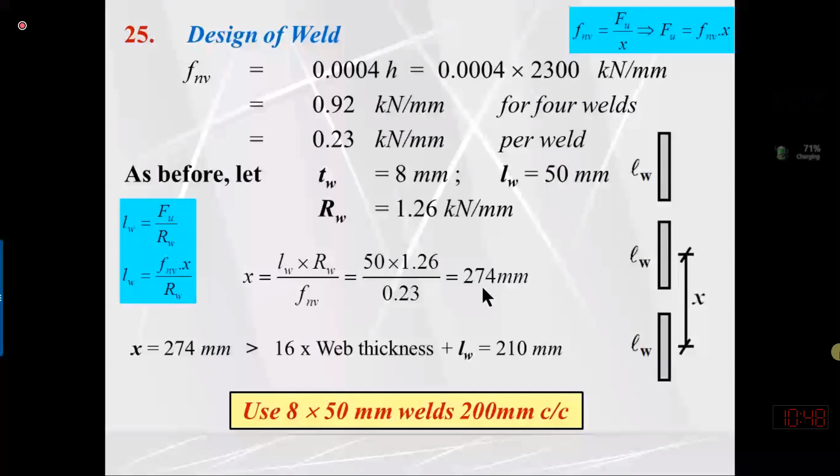But AISC says, as we have already discussed, the maximum distance - clear distance between intermittent fillet weld - should not be more than 16 times the thickness of the web and 250, whichever is lesser. Thickness of the web is 10 millimeters, 10 multiplied by 16 is 160. So 160 is lesser than 250. So it means the clear distance between the intermittent weld is 160 maximum.

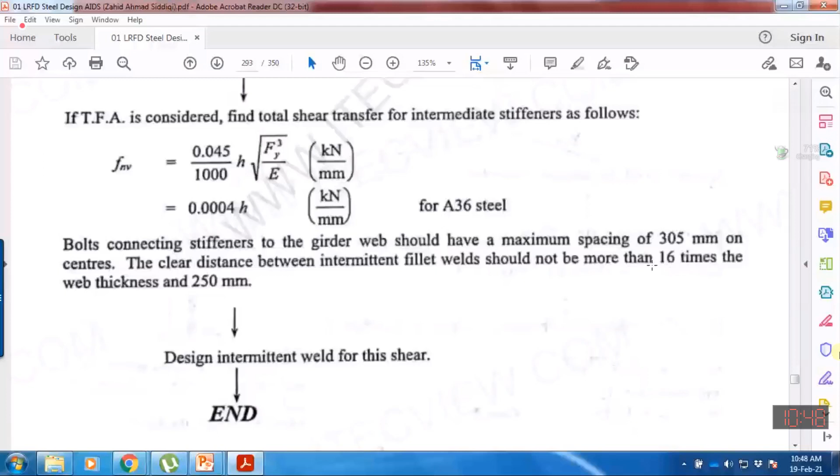So that is the clear distance, but we want to determine the pitch or center to center distance. Clear distance is 160, and if we want to determine the center to center, we need to add half length from the one side and half length from the other side. So 16 times the thickness of the web, 160 plus 50, the answer is 210. So the maximum spacing that we can provide is 210. Whichever is lesser, that will be our answer.

So one x value we have computed from here, which is 274, and one x value we have computed from the AISC guideline, which is 160 plus length of the weld. So maximum pitch or center to center distance of the weld should not be more than 210. So we will round to the lower side.

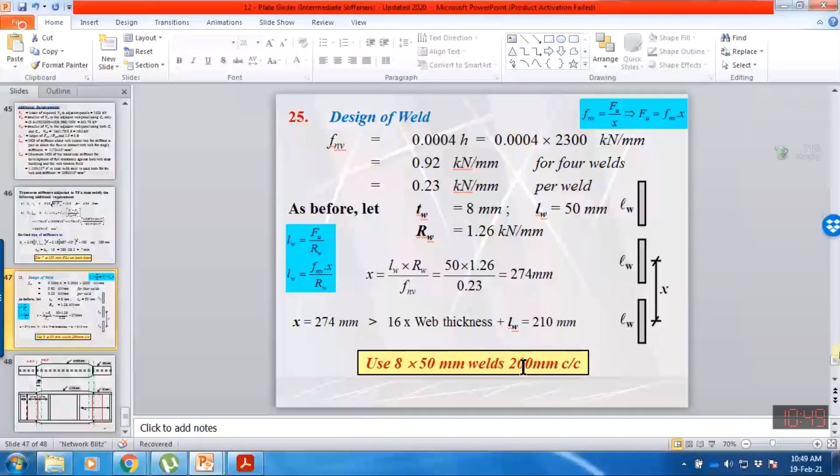So we will opt the spacing 200 millimeter center to center. We are providing intermittent weld, 8 mm thick and length 50 millimeter, and length and pitch equal to 200 millimeter. So how we can provide the weld? We have to provide intermittent weld like this. We have to show it by the proper designation, just like I have explained.

But if you want, I will show you arrow on both sides. So this must be 8 thickness and 50 mm at 200, center to center.

Similarly, you need to show the weld also here, or maybe also on this. Maybe on only one stiffener is okay. So we are providing intermittent weld, and at this point we are providing the continuous weld to connect the flange with the stiffener. So this is the end of intermediate stiffener.

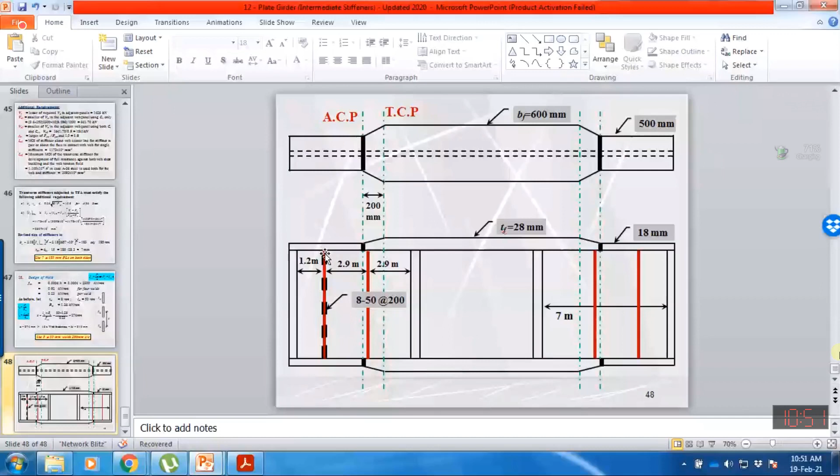You can solve the example given in the book for your practice. And when you are coming after your midterm exam, I need only 2 hours to complete the bearing design of the bearing stiffener. So that I will complete during the classes when you are coming on campus. So if someone is having any question, he can raise the hand. First of all, please raise the hand if you are present. All the students who are present, please raise the hand.

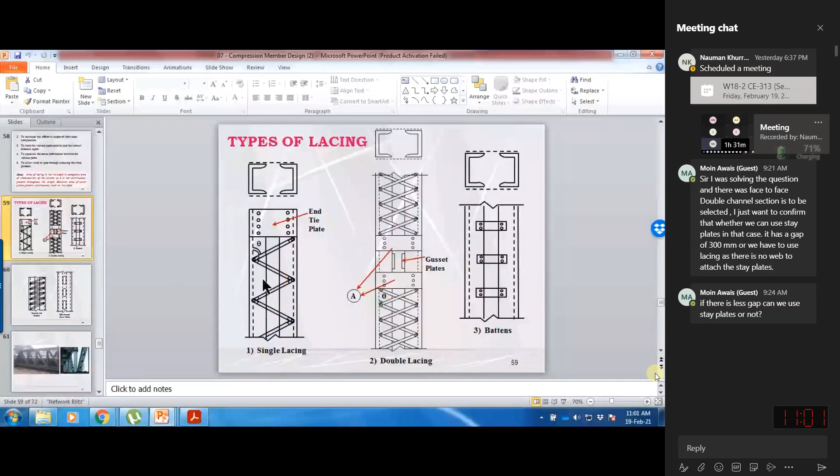So gap is almost maybe 4 inch or 100 mm. So he has used the batten.

तो जस्ट अज्यूम करेंगे अगर यहाँ पे वो स्टे प्लेट यूज करता है तो वो इतनी हैवी होती, स्टे प्लेट्स का विड्थ ये होती, लेंथ उसकी यही 75 और दूसरी साइड में उसकी जो विड्थ है इक्वल, तो दैट वुड बी अनइकोनॉमिकल। तो गैप अगर 10 या 15 mm है तो, अगर 20 mm से ऊपर और 100 mm के दरमियान है तो बैटन यूज कर लें, अगर उससे भी ज्यादा है तो फिर लेसिंग।

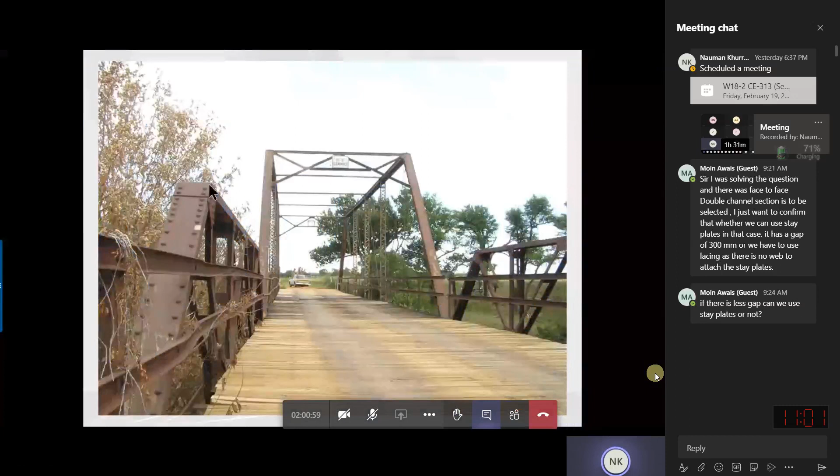So that is depending upon our field condition or whichever is the economical. So you got it, Moin? Moin, you got the answer? Yes, sir. Yes, sir. Yes.